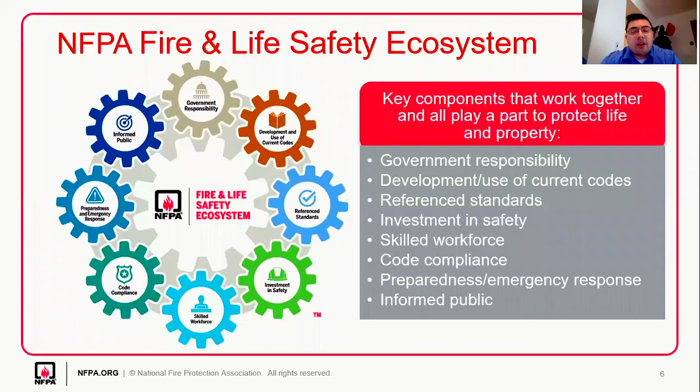By attending this presentation, you are fulfilling your responsibility as both an informed public and investing in safety. And I think Bill did a great job of highlighting a lot of that in the beginning. Again, we are committed to safety in this industry, and we want to continually help improve safety and make sure everyone comes home. So this fire and life safety ecosystem is an important concept when looking at the safety industry in relation to fuel gas, because again, it's not all on NFPA to do this alone. It's not all on the government agencies to do it alone. Everyone has their own part to play in this.

So I'm just going to briefly go over the standards development process. There are 4 distinct stages in our standards development process. The first stage is the public input stage, where the public gets to input changes into their document. Following that stage, and after the technical committee reviews it, it goes to the public comment stage, where the public again gets a chance to review the changes that the technical committee made to the code, and then provide additional comments and feedback on it.

After that, if there's still any changes left that haven't been done, it goes to the NFPA technical meeting, where members of the general public as well as NFPA members get to potentially hash out any final issues they have with the code. And then after that, if there are still pieces left unsolved, it can be a Standards Council appeal, or it becomes an issued consent standard.

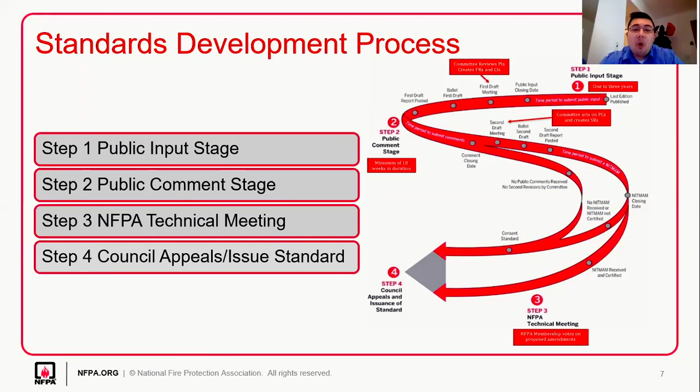So just expanding a little bit on how the cycles work, the first draft, which is that public input stage, we take the current edition and we open it up for the public to put comments into it. So the 2021 edition of NFPA 54 was issued beginning of May and will be opened up again so that people can put in text changes to the code. That text is all taken and given to the committee at the first draft, where the committee is obligated to respond to the public changes.

The committee can do one of three things with public inputs. They can reject a public input because they don't believe it's technically valid or it's addressed elsewhere in the code. They can change the code through a first revision, proposing a change that will be enacted. Or lastly, they can do a committee input, a trial balloon where the committee is looking at changing something but doesn't have enough feedback yet, so they want to put it out to the public again.

So let's say you don't like something in regards to piping materials in NFPA 54. You can put in a public input and let the committee act on it. If you want to find out how the committee acted, you would go to the first draft report, and I'll tell you how to get to that later in my presentation. Now from that first draft report, let's say you found the text change you were trying to make, and they didn't do it exactly the way you wanted.

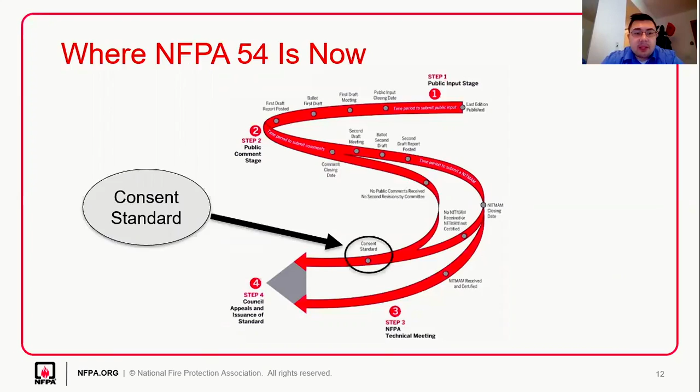The next couple slides were relevant to the technical meeting that happened last week, but since NFPA 54 didn't have anything on the technical meeting that needed to be resolved, I'm just going to skip a couple of these slides.

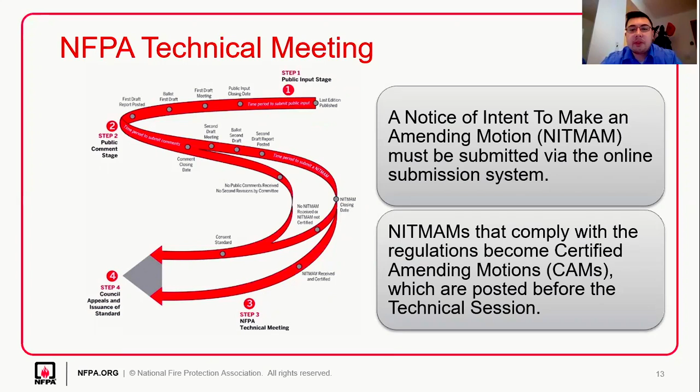So now we're going to go into the significant code changes within NFPA 54, the 2021 edition. Here are some of the key code changes I've highlighted throughout the code, and then I'll get into individual chapters and sections a little later and break it down by topical area.

Firstly, we've defined what an engineering method is and made requirements for it. In previous editions of the code, we would say it could be done by an approved engineering method or something along those lines.

There have been a lot of AHJs, authorities having jurisdiction, that have had questions on what an engineering method is. Do I have to have a professional engineer sign off on it? Do I have to have someone using a computer program? What is an engineering method? So we've made requirements for those so that AHJs can more uniformly enforce the code.

Any appliances that you are having installed now has to be listed to an appropriate listing standard. We've added a whole bunch of ANSI CSA standards, and this is because having an appliance listed to a listing standard increases the level of safety. Unlisted appliances are still allowed to be installed, but NFPA 54 has removed some of those unlisted installation requirements, and now it's left up to the design engineer to get equivalency applied with their AHJ to allow these installations.

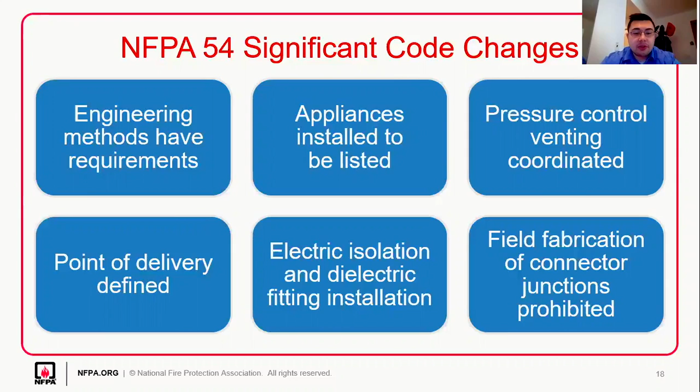So those are the significant code changes. And now I'll just go into a little bit of each of the changes in each of the chapters.

For equivalency, since we've removed a lot of the unlisted appliance installation requirements, we've added some examples of equivalency so that authorities having jurisdiction have a better idea of what they can and can't approve for equivalency. So we've added those in Chapter 1.

Additionally, since we added a lot of those CSA ANSI standards in the appliance installation section, we updated a lot of the reference standards in Chapter 2. So you could go there to figure out the appropriate year and edition of the standard we were looking at.

Point of delivery, again, has been defined. We added definitions for system shutoff and service shutoff. Service shutoffs were previously in the code, but according to DOT PHMSA, they could only be operated by a qualified person, which members of the public and certain technicians are not, so they couldn't activate them. To get around that requirement, certain gas companies have been installing system shutoffs, which essentially perform the same function, shut off the gas supply to the system, and can be operated by a non-qualified person.

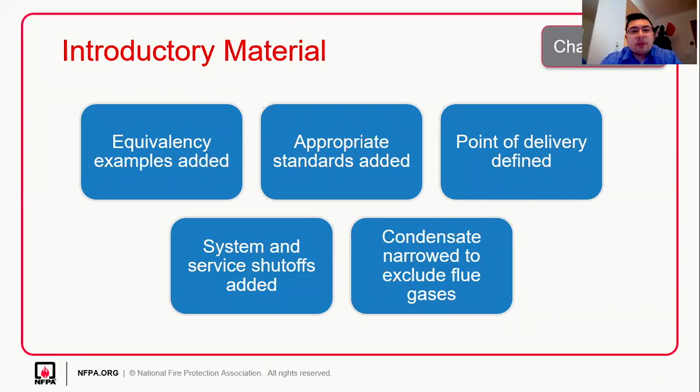And then lastly, in the definition section, we've also narrowed condensate down to exclude flue gases, because the condensate we were thinking of was drip liquids in the context of this code. So we've narrowed down that definition.

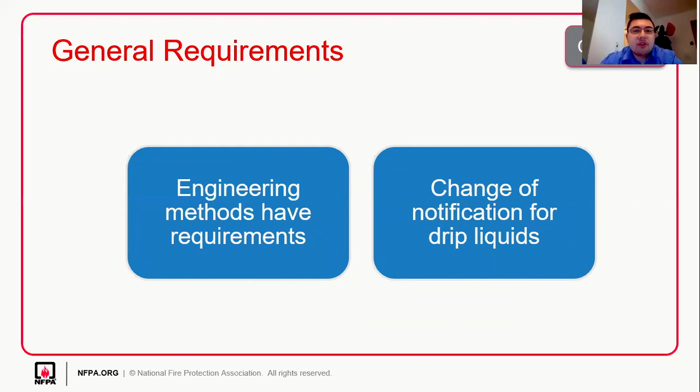Chapter 4 has all the general requirements. Some of the changes here, again, we've added requirements for engineering methods. And then we changed when notification of drip liquids is required. There are certain instances, mainly industrial settings, where it gets kind of tedious to notify the servicing gas supplier of drip liquids. Some of these industries have better practices, or it's part of their normal operating procedures to handle these drip liquids. So we've changed when the notification is required for drip liquids.

Moving on to the piping requirements in Chapters 5 and 6. The specific location of the point of delivery is in accordance with DOT PHMSA or NFPA 58, depending on the type of fuel gas you're using. Both of those applications are outside the scope of NFPA 54's code, because we take over after the outlet of either the gas meter or the second stage regulator. So we removed all those requirements because it's outside the scope of our code.

Pressure control venting requirements, again, we reorganized those in Chapter 5 and concentrated them there.

We have a shutoff valve selection table now in Chapter 5. Depending on the pressure your manual shutoff valves are seeing, they're going to have to be listed to different listing standards, so we've created a table for those.

If you're heat fusing polyamide piping, you need to have that labeled as such nearby.

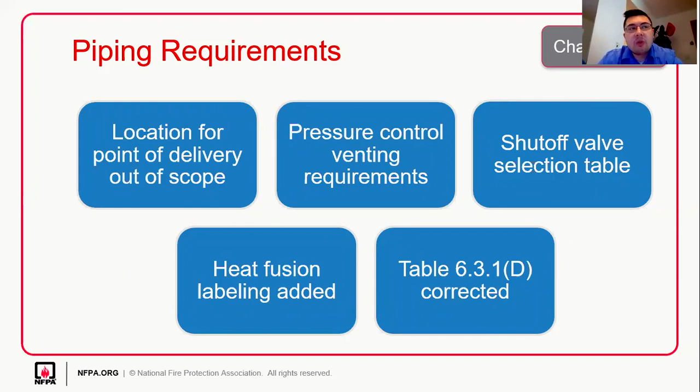Lastly, one of the piping tables, 6.3.1(D), we corrected. Previously, we were missing two lines in that table, so it would overcalculate piping capacity for the rest of the rows in the table, so we've revised that.

For piping installation requirements, we've now added requirements for compatibility of pipe sealing materials. It's come to the committee's attention that some pipe sealing materials that have been used weren't appropriate for the system they were being used in, so the committee has requirements for evaluating that.

We've changed the elevation of above ground piping and above roof piping. It's been raised to about 3.5 inches, such that debris can flow underneath the piping and not get stuck there and accumulate. Again, we've revised the electrical isolation and dielectric fittings installation section.

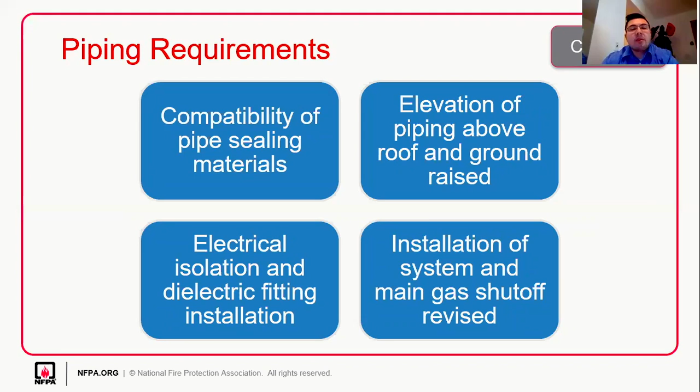In order to accommodate the changes for system and main gas system and service shutoffs, we've revised some of those requirements and added some requirements for the system shutoff.

Appliance requirements in Chapters 9 and 10. In addition to requiring the appliances to be listed to the appropriate ANSI standard, we are also requiring that the appliances be converted in accordance with the manufacturer's instructions.

If you're converting from natural gas to propane or propane back to natural gas, the appliances have to be converted in accordance with the manufacturer's instructions, because some appliances can't be converted, or the appliance manufacturer has specific requirements for converting it. Additionally, any gas appliance regulators that are required are going to be required to be listed as well to an appropriate listing standard.

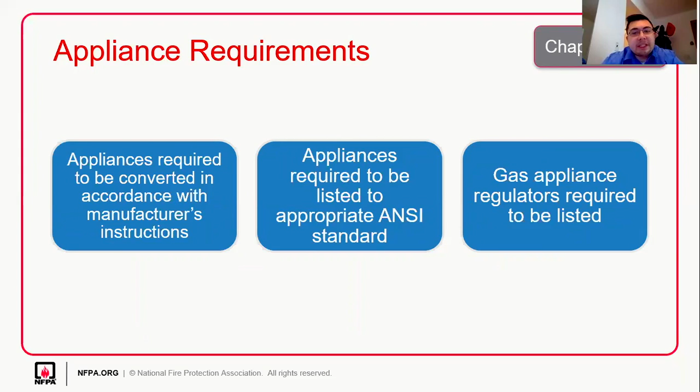Chapters 12 and 13 cover venting. Some of the venting changes we have in our standard: any factory-built chimneys have to be listed, and there's an appropriate UL standard in the code that is listed to.

Direct vent appliances are allowed to have through-the-wall vent terminations. We've created a new table and chart so that all of the distances are harmonized with the appropriate ANSI CSA listing standards for direct vent appliances, and that way they're not in conflict with the other codes.

Again, we require that all installations for venting systems be in accordance with the manufacturer's instructions as well as the appliance manufacturer's instructions. This is because certain appliances have to be vented in certain ways in order to maintain their listing. So installation of the appropriate venting system must be maintained in order to appropriately accommodate the listing. Same thing with condensation drains in that regard.

Field fabrication of connector junctions is prohibited as before. And then lastly, we added requirements for balancing baffles.

Previously in the code, we still do have a prohibition for manual dampers and other obstructions in the venting, because these things can be inadvertently turned or maneuvered into a way that restricts the venting and causes inappropriate venting. But balancing baffles are required to balance the draft system in some systems. These are baffles that are manual, but as soon as they're balanced, they're locked into place so they can't be inadvertently turned.

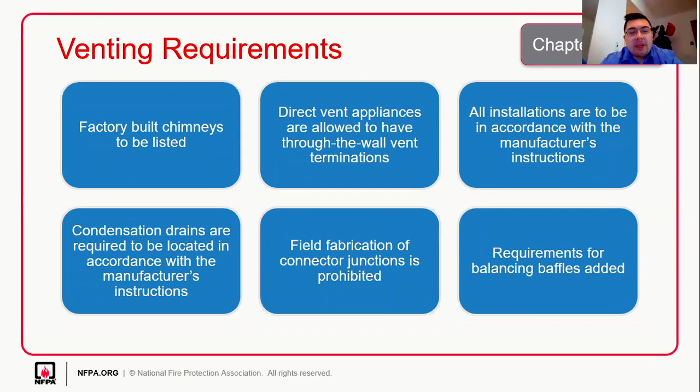Lastly, some changes to the non-mandatory requirements section. Annex G has been revised to address spillage and adequate combustion air. In previous editions, the order of operations didn't make sense, so we revised it such that it matches what the industry is practicing.

Annex G also now recommends replacement of the appliance regardless of damage assessment. Previously, we had to have the technician assess the damage and recommend or not recommend a replacement, but in terms of liability, it's a lot harder to have technicians do that. So our recommendation here is just to replace the appliance in that regard.

So those are all the changes within NFPA 54, and we'll handle questions in a second.

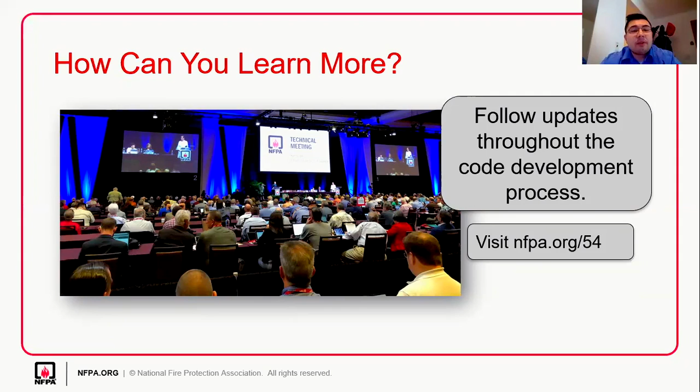NFPA 54 has a handbook as well that provides graphics, visual aids, and extra commentary. It goes over certain aspects of the code in more depth to help explain it, as well as highlight some of the new changes and explain why we put some of these things in there. So there's a handbook for that, and that's a resource you can use as well.

Lastly, you can join our NFPA membership as well as our Xchange service. Some of the benefits of becoming an NFPA member: you get to vote at our annual technical meeting on certain changes, which is important if you're passionate about the code. You can get one-on-one help with technical questions, access to other content, and connect with colleagues who also have code questions. The service also allows you to see previous questions people have had, as well as the answers, which is helpful because oftentimes people don't have a new and unique situation - it's probably been asked a million times. So signing up for Xchange could definitely be a resource you guys can use as engineers to increase your knowledge and your safety.

And then lastly, you might have seen our tagline, "It's a big world, let's protect it together." It's not just a slogan for us, it's a call to action. Through that, we hope you'll join us in protecting this world that we live in. Thank you guys for your time, and I guess I'll give it back to Bill for any questions you guys have.

All right, hey, thank you so much. My pleasure, it's a wrap. Please do send me a copy of your presentation. We'll put it with the recorded portion of the expo, and that way we can connect as needed in the future. So super helpful, and thank you so much for being a part of this. Without your assistance and keeping us on the straight and narrow, we would go adrift, right? So appreciate it, man. Yeah, thanks a lot.